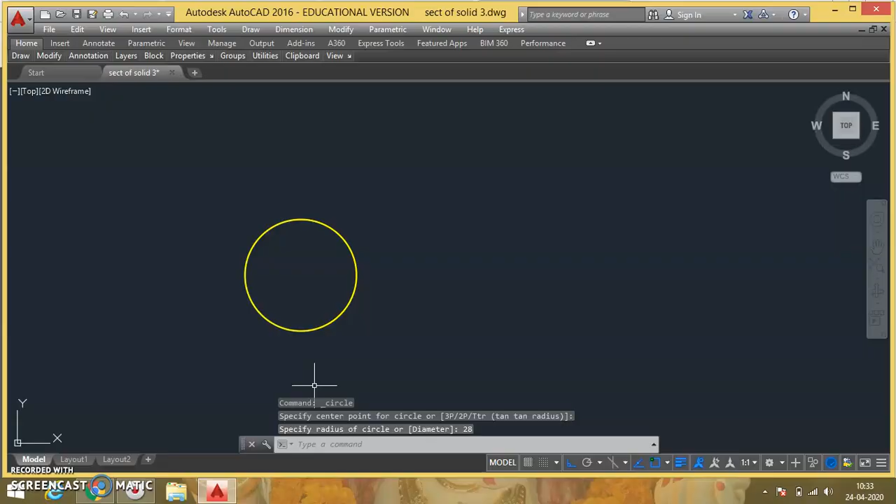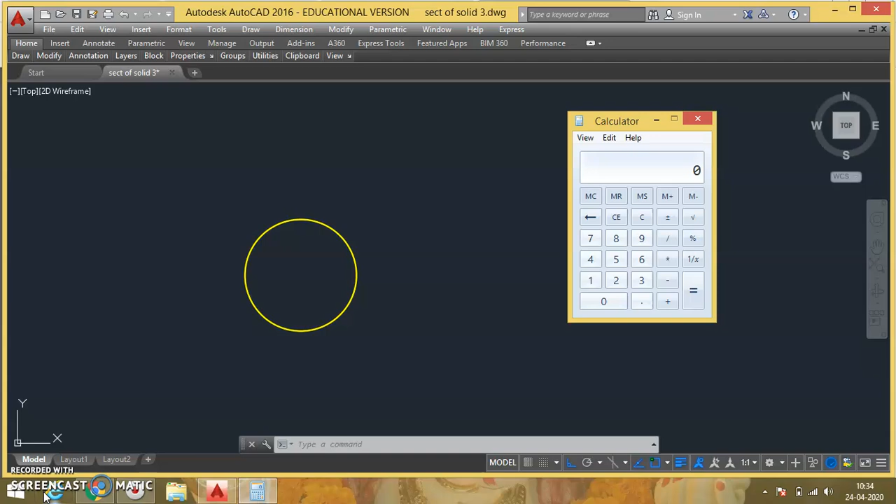Once you draw the circle, the very next thing you can do is draw a line which will be tangential to this circle for a distance of 2 pi r. Now the distance of 2 pi r is coming out to be 175.84. So I can take a line command and draw a line from this tangent point for a distance of 175.84 or 8. This you can draw manually.

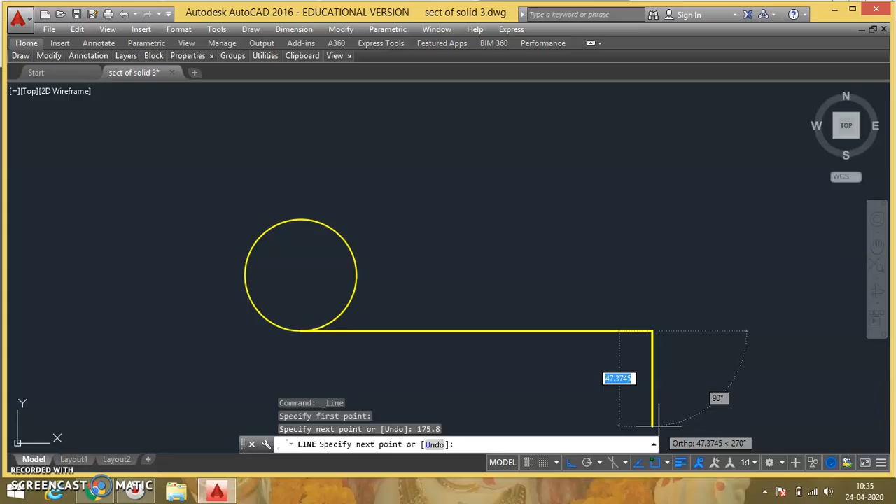Once this is done, we will divide this circle into 8 equal parts. To do that, I can draw a line vertically here, then horizontally, then 45 here and 45 here. So as I said, you can resolve this into 8 equal parts. 45° each will be the division of the circle.

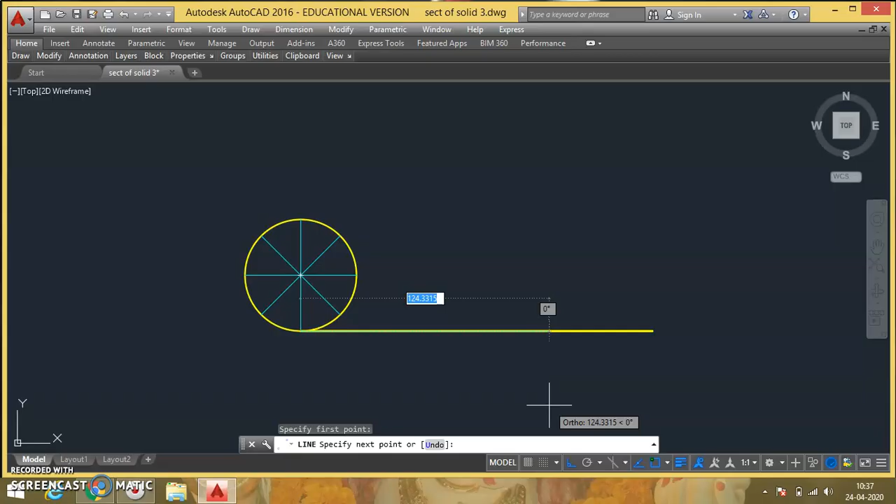Now since we have divided the circle into 8 parts, I have to divide this line also into 8 parts. To do that, what we generally do is take a line command. We draw a line here at some angle for some distance. For example, if I want to do the 8 divisions and want them to be the same, I will take a line of 160 mm at an angle of maybe minus 30.

So here we have drawn a line at one angle. Suppose 30°. We have taken this angle as 30°, and you can take some length. It's not necessary that it should be exact. I have taken it exactly because if I take 160, then I can divide this line into 20 mm each. That is why I have taken the line as 160.

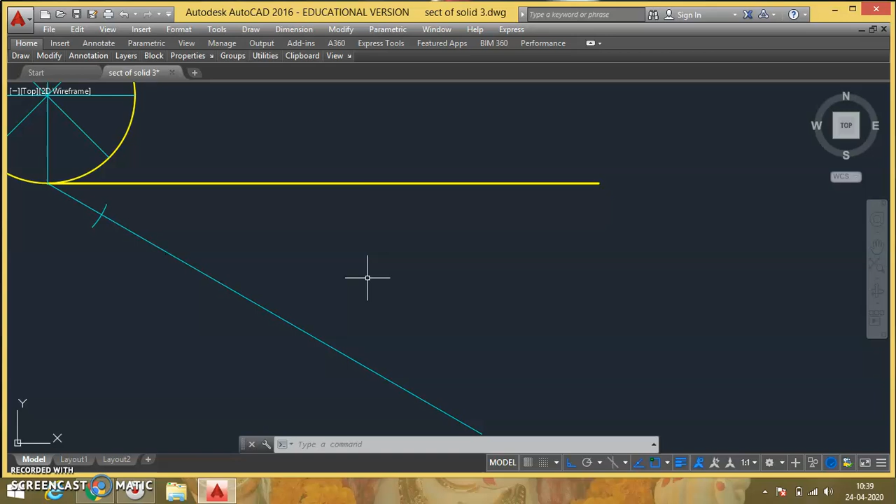Now I can just divide this line I have drawn into 8 equal parts. Since I have taken this as 160, I can take 20 mm in the compass and go on marking the divisions. So like I said, since I have taken this line as 160, I'll take 20 mm in the compass.

We'll put this and mark one arc. Then I'll take this center and again 20 mm here, again 20 mm here. Like that I can do it. So like this you will get the 8 divisions on the line: 1, 2, 3, 4, 5, 6, 7, 8.

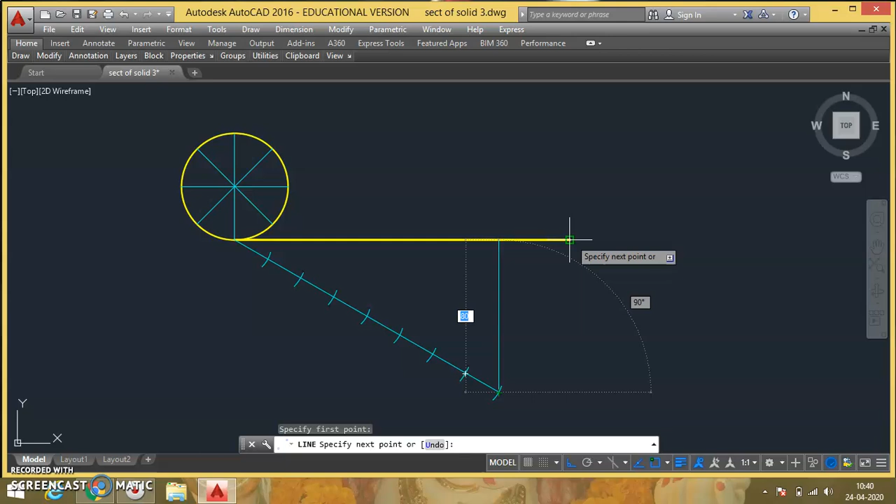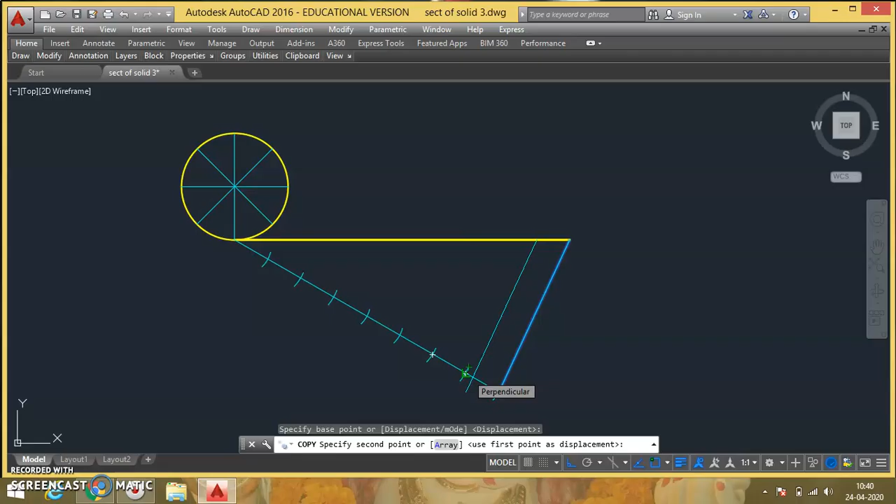Once it is done, I'll join this last point with the last point of the line which you want to resolve into 8 components. After that, I'll start drawing lines parallel to this passing through these points. For example, for this line we got, I'll draw one parallel line to this, then here, then here, then here, then here, then here, and so on.

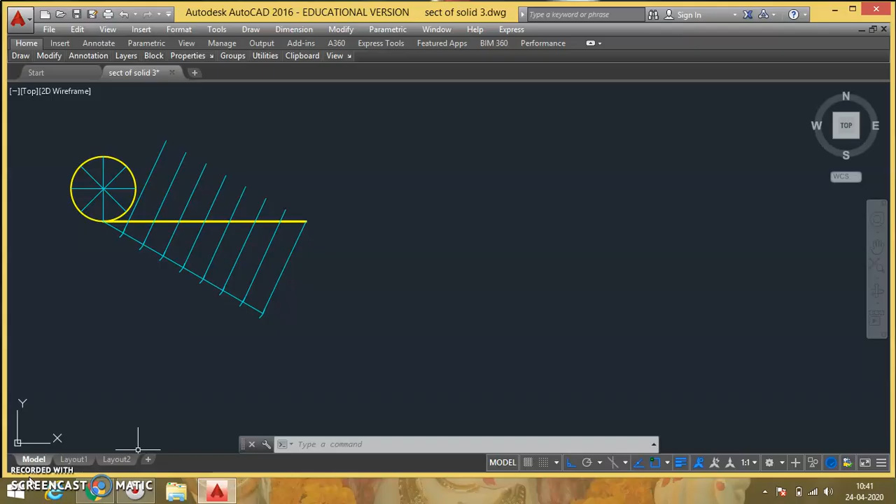So we got parallel lines passing through these points. What we did: we have taken some length, divided that into equal parts, suppose 8 parts, then joined the 8th part with the last point, and then drawn the parallel lines. With this we have got the equal divisions of this line 2 pi r into 8 equal parts, because we have divided the circle into 8 equal parts.

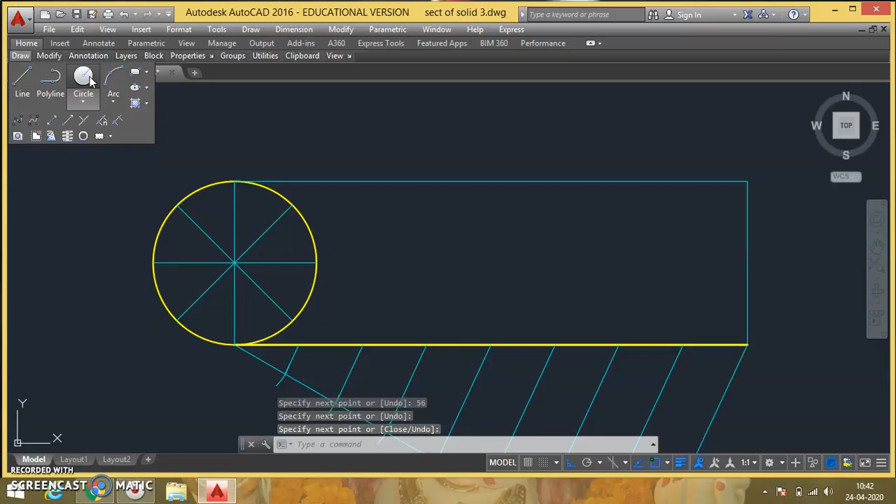Once this is done, you can draw the line. Here also I can draw a length of 56 because the diameter is 56, and I can join this. Basically we are projecting all the points. If you want, you can always draw a circle here as well. So I can draw one circle here and project these divisions on this circle as well.

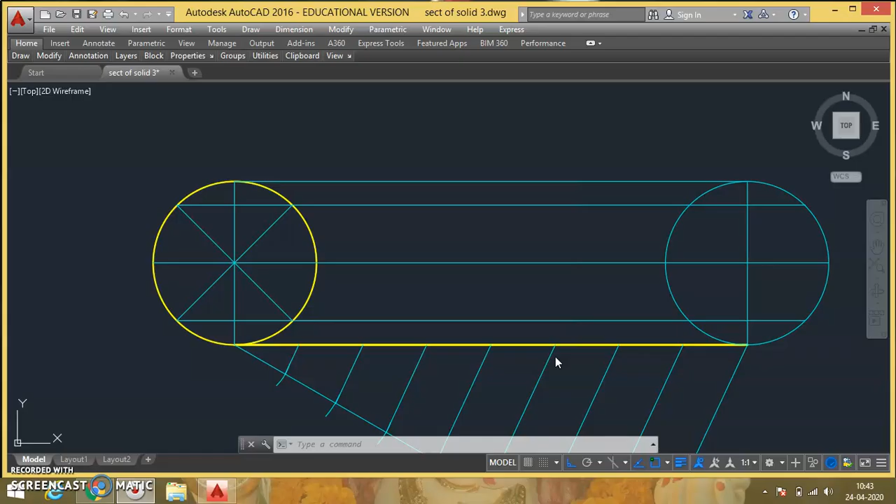Once you project these points on this side, I can just name these points on the circle. So for example, 1, 2, 3, 4, 5, 6, 7, 8. Similarly, this one will match here, so this will be 1. This 2 will match here, so 2, 3, 4, 5, 6, 7, 8.

Once you name these points, what we can do is mark the respective centers of these divisions. For example, if this 1 comes here, automatically the center will just come above the point 1 here. That will be C1. Since above point 8 there is a center here, similarly when this 1 point comes here, the center will be just above it. So this will be 1, this will be 2, this will be 3, this will be 4. Similarly, you can locate the centers.

So you can just draw the line passing through this point and intersecting on the center line. So like this you can get the line. You can draw these lines manually easily. Once it is done, I'll just name these points. So for 1, this will be C1, C2, C3, C4, for 5, C5, for 6, C6, for 7, C7, and 8, C8. So this is the way we can name those centers here.

Now in the question it is given that initially the point P, for which we have to trace out a curve, is lying here, in contact with the ground. So you can name this point as P. Now when this starts rotating on this particular line, this 1 will come here. In that case, P will go to point 7. When 2 comes here, P will go to point 6. When 3 comes here, P will go to point 5. When 4 comes here, P will go to point 4.

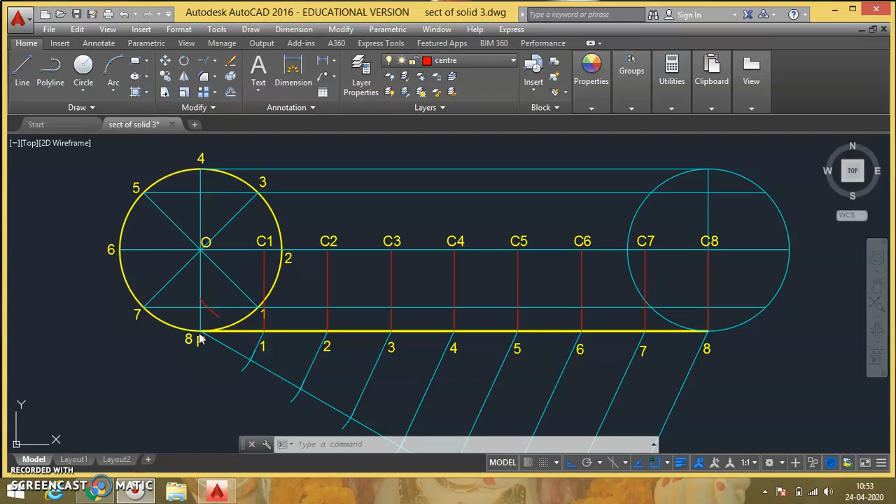For example, I have taken the radius into the compass, keep it at C1, and mark the arc on this line, because I know P will move to this stage, so automatically it will be at this height. So I mark that. Then I take the same distance in the compass, put it at C2, and mark it on the second line. We got the arc here.

Same way I take the same distance in the compass, put it at C3, and mark it on line 3. After marking the arc from C3, we got this point. Same way we can do for C4, then C5 on this side, then C6, C7, and finally C8. So with this we have marked all the points: C3 on line 3, C4 on line 4, C5 on line 5, C6 on line 6, C7 on the 7th horizontal line, and C8 on 8.

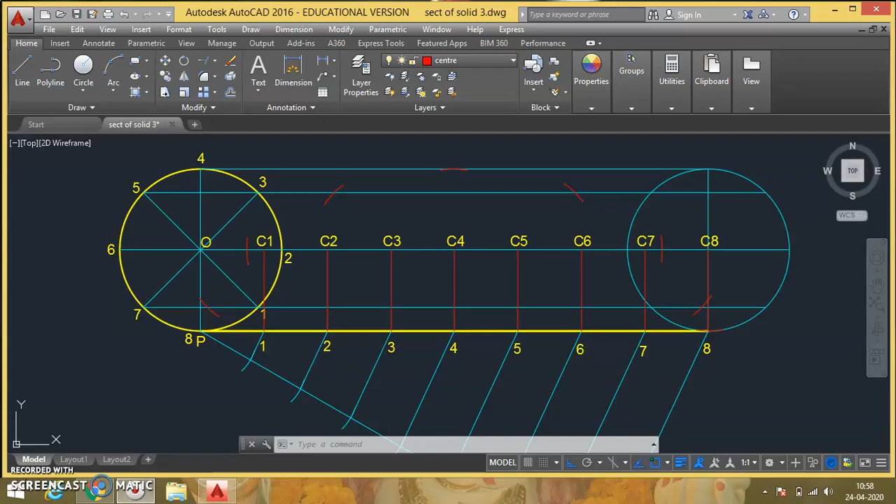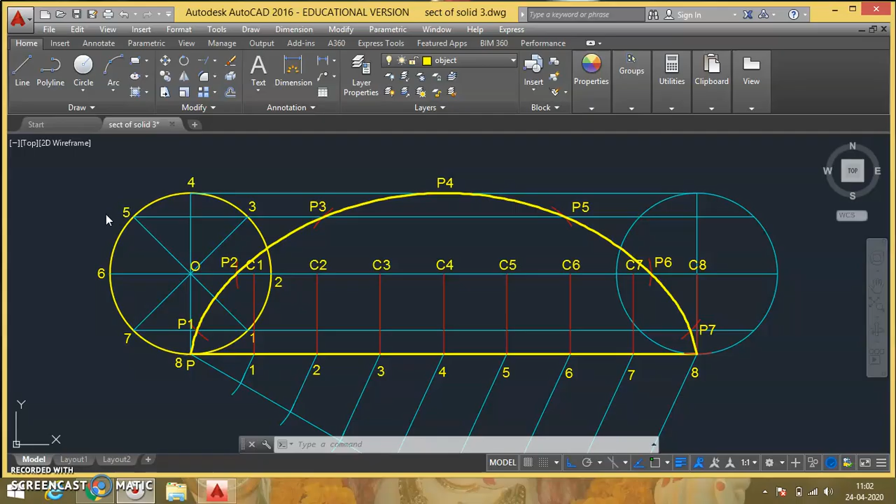Now if I join all those points together, what I generate is nothing but a cycloid. I have joined these points to get this curve. The curve should be drawn so that you get a smooth curve, which is called a cycloid. You can name the points you got here. So this is the final figure, which is nothing but a cycloid. So you can name this curve as cycloid.